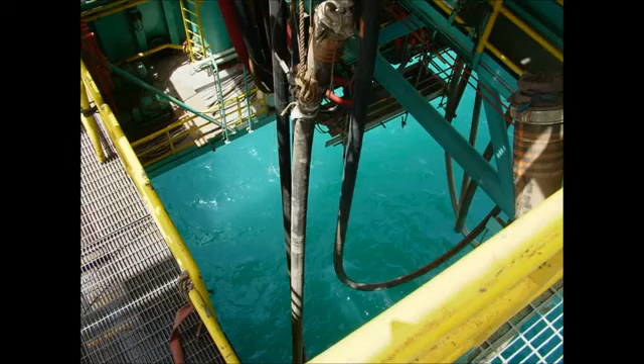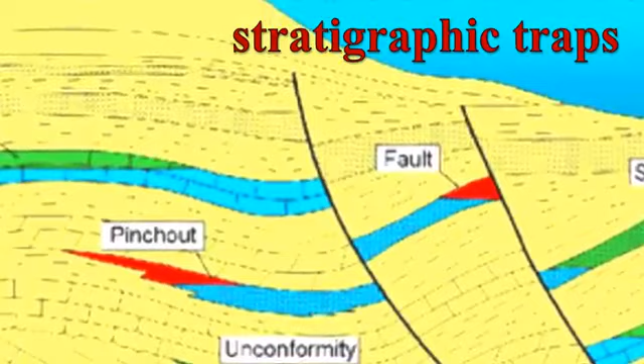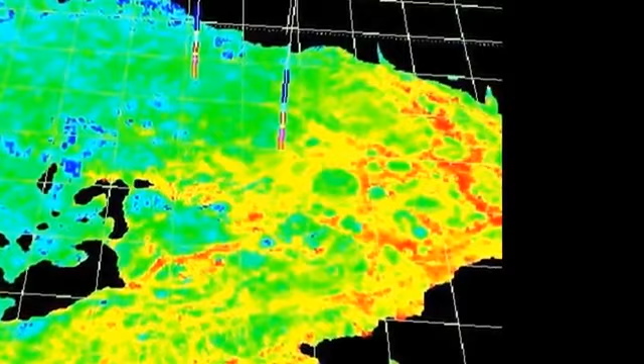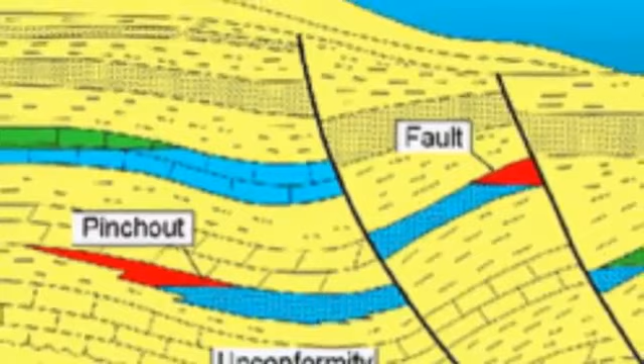When appraising and developing stratigraphic traps, the step-out procedure is different. Because seismic data is of little value in these kinds of traps, other available, less accurate data is used to help establish the spill point. Unlike pinpointing the spill point in an anticline trap, finding the spill point in a stratigraphic trap, unfortunately, is less accurate, resulting in a greater potential for drilling dry delineation wells.

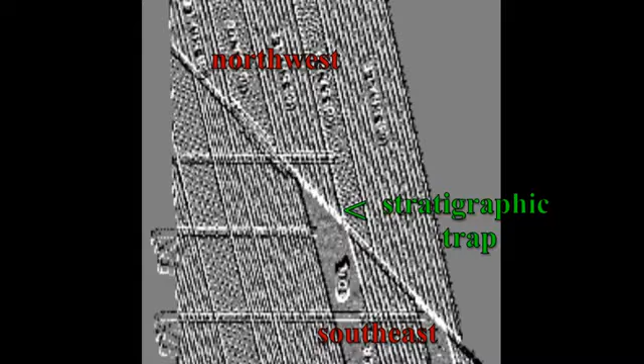When looking for the spill point in a stratigraphic trap, it may be necessary to rely on data from outlying, producing fields in the vicinity where data is available. For instance, if stratigraphic traps nearby have shown a southeast-northwest orientation, then the exploration team may use a similar pattern in their own gradual step-out.

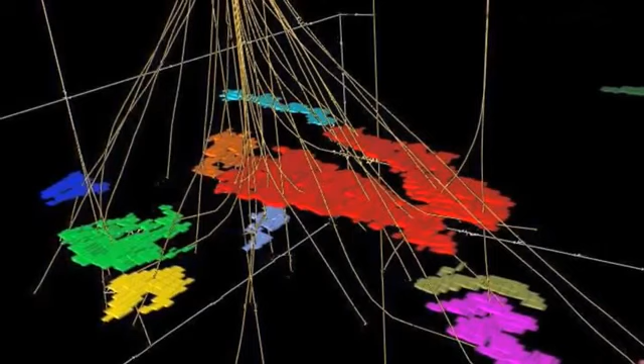In any event, once the exact dimensions of the reservoir with its thickness and locations of the hydrocarbon deposits have been determined from an accurate mapping of the OWC points, then OOIP, original oil in place, can be calculated for this subsurface structure. See Chapter 5. Being able to calculate OOIP is important because it allows the team to define and then determine the size and scope of future economic field development.

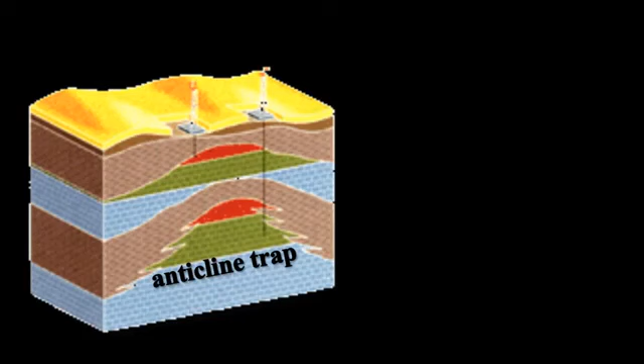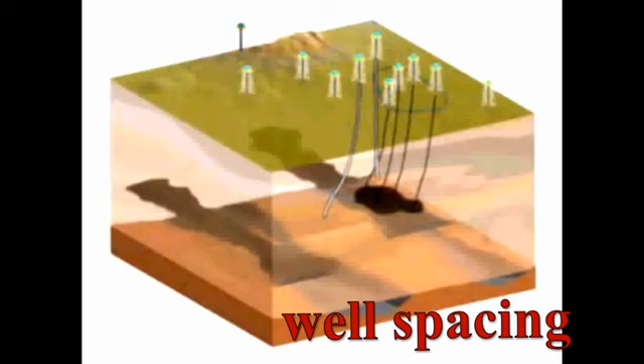Step-out drilling, therefore, whether in structural traps like anticlines or stratigraphic traps like a pinch-out, is important when conducting a field appraisal for future development. Once the shape, size, and thickness of the contours of the field have been defined utilizing step-out drilling, the next major issue to address is well spacing. Well spacing involves a planned program that determines the optimal number and spacing of wells that need to be drilled to deplete a given reservoir over a reasonable period of time.

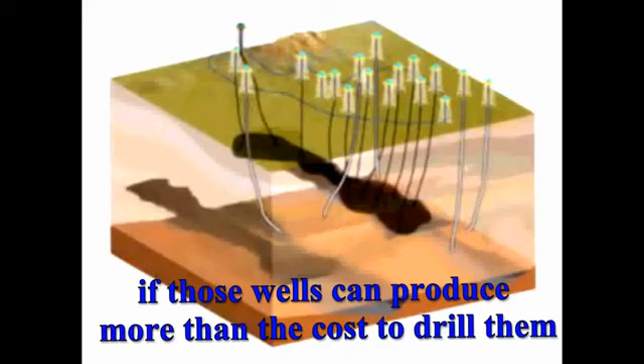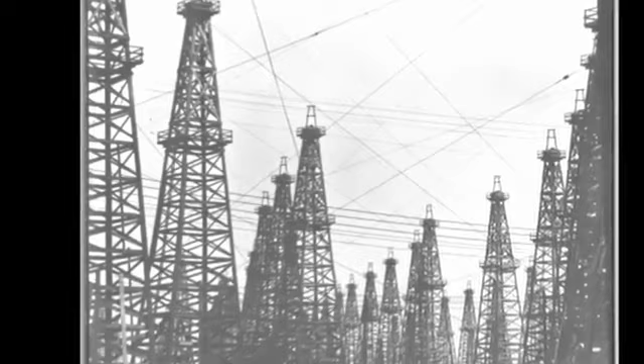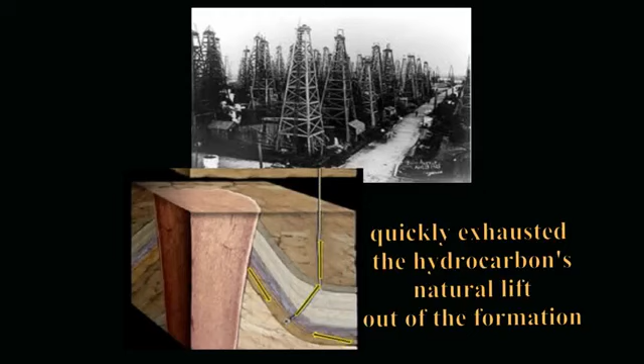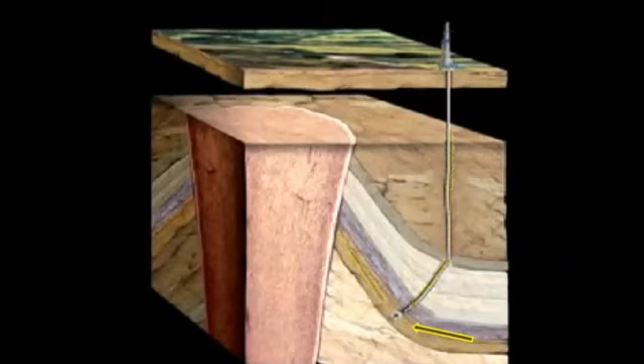In fact, it makes better economic sense to produce the oil at a faster rate with additional wells if those wells can produce more than the cost to drill them. How many wells, though, are too many? I'm sure you all remember old pictures from earlier times when derricks dominated the landscape over an oil field. Built practically on top of each other, these wells were drilled so closely together that they quickly exhausted the hydrocarbons' natural lift out of the formation. The result was that in these oil wells, production became so low they had to be abandoned, even though oil was still trapped in the formations. These wells did not have enough lift for the oil to flow to the surface.

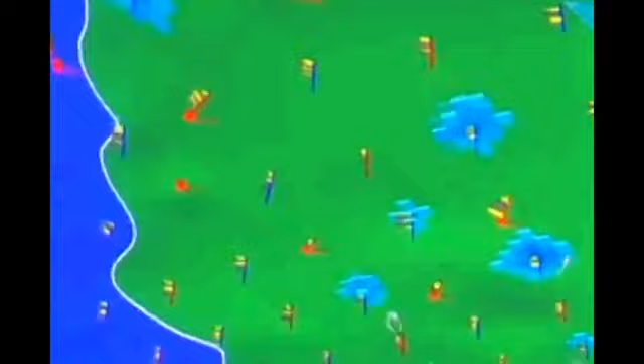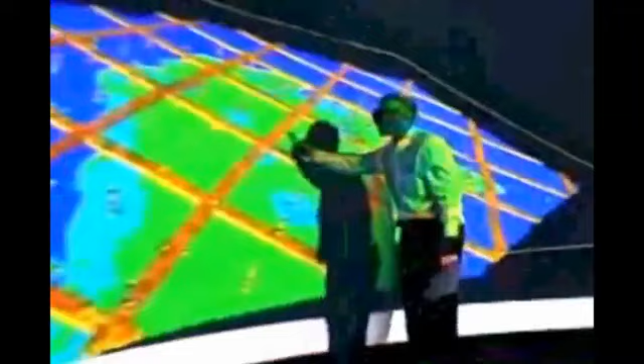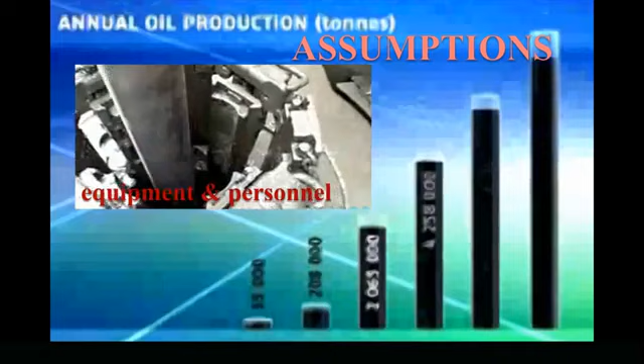Good engineering and a better understanding of the reservoir over the years, fortunately, have greatly increased our ability to improve the percentages of the amount of hydrocarbons that can be produced from a given reservoir. Well spacing, therefore, is a strategy that helps improve these percentages of hydrocarbon production while recognizing economic realities. To arrive at an optimal number, assumptions about the future costs of equipment and personnel, the spot and future prices of oil and gas, and interest rates have to be made. In addition, fluid viscosity should also be added to the equation.

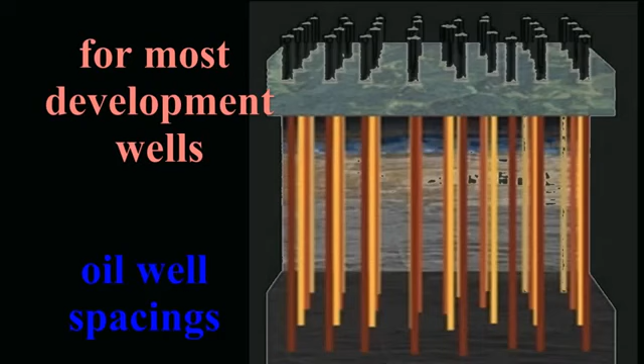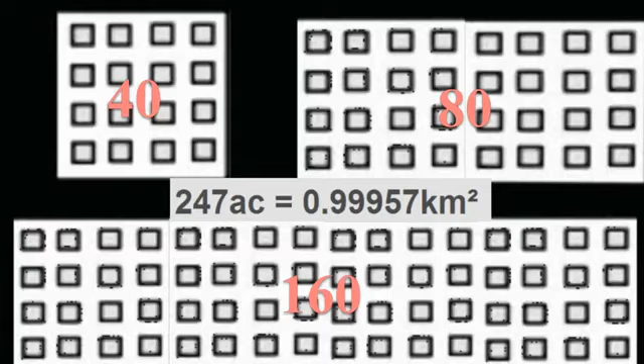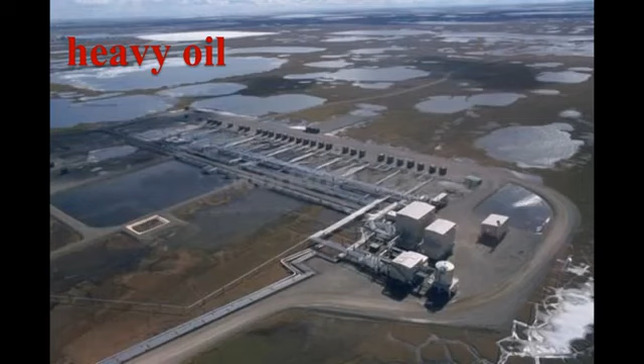For most development wells, oil well spacings are typically 40, 80, or 160 acres apart. Remember that there are 247 acres in a kilometer squared. There can be exceptions to how far apart producing wells need to be. Heavy oil fields, for example, could be drilled as tightly as 1/2 acre per well. Gas fields, on the other hand, typically use a 640 acre spacing. In any event, well spacing that defines the number and location of wells to be drilled, along with step-out drilling, are essential components in field development.

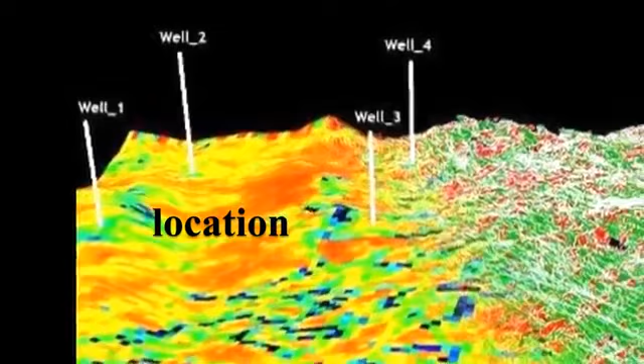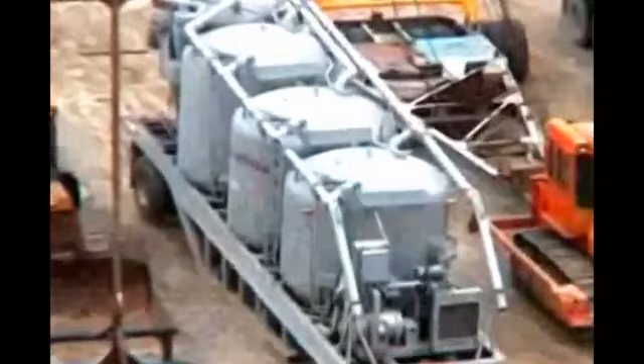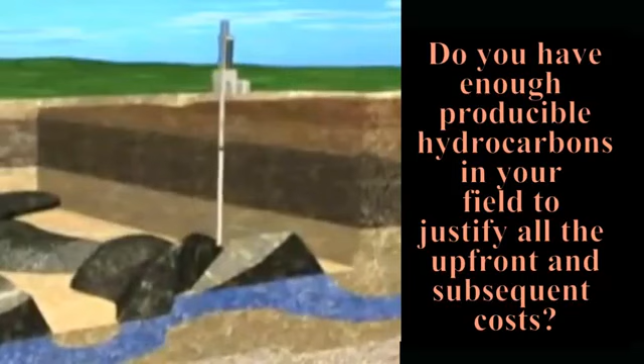By knowing the location and the number of wells you will be drilling, you can plan for the costs of the overall equipment, like surface facilities, personnel, pipelines, general oil field equipment, etc. Being able to put a tentative price tag on the estimated costs of development and production, you are now better able to answer the question of whether you have enough producible hydrocarbons in your field to justify all the upfront and subsequent costs.

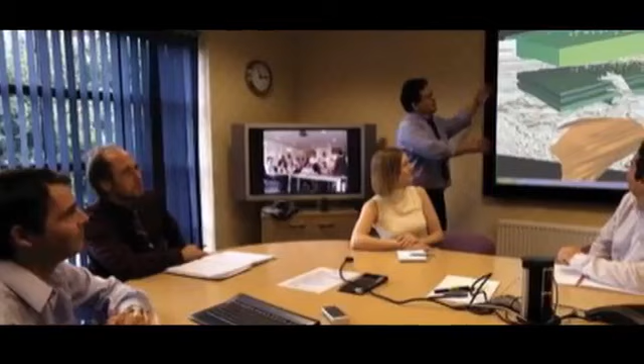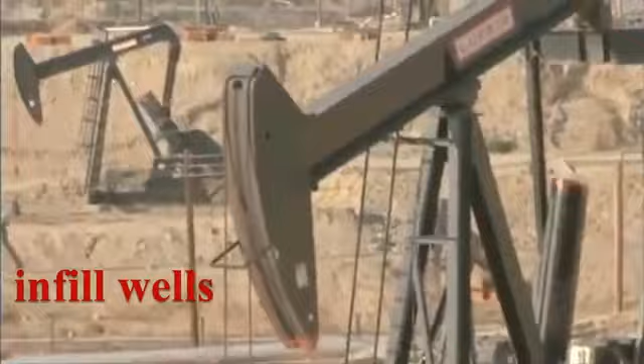After the step-out drilled field has been evaluated, optimally spaced wells have been planned, and the decision to go forward has been made based on the field appraisal, the process of drilling production wells to produce hydrocarbons begins. Like all plans, falling production rates in a reservoir over time may force field development plans to be revisited. These wells are known as infill wells. Unlike step-out drilling and well spacing, infill drilling usually is done after the well has been in production for some time, so the equipment to conduct infill drilling will be that of a production well, not an exploration well.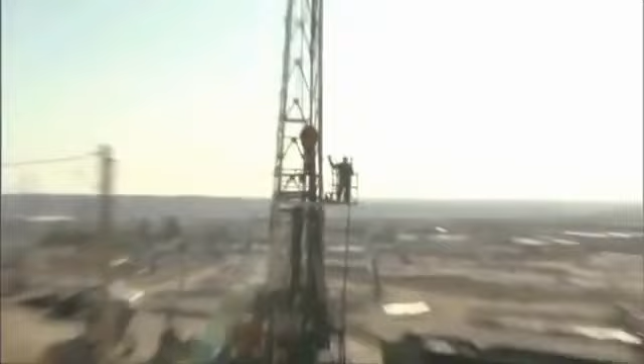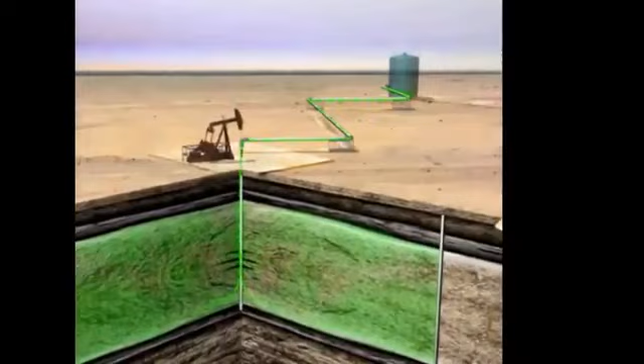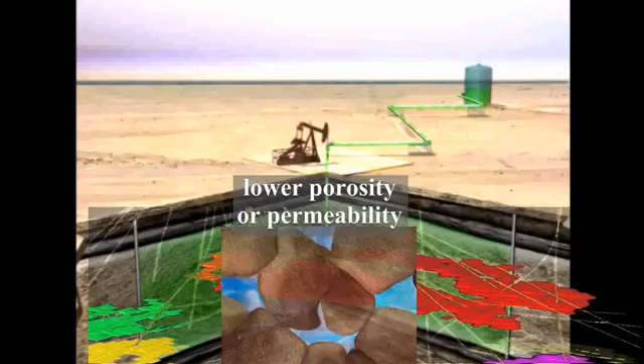There may be several reasons for drilling infill wells. Here we will describe three. One reason to drill infill wells is due to a reevaluation in the time needed to deplete a reservoir. Remember, oil fields are not always homogeneous. For example, some sections of a reservoir may prove to be of lower porosity or permeability than was calculated in the original appraisal.

These changes could adversely delay the time that this field could have been adequately depleted using the original spacing. When non-homogeneous conditions arise, these newly drilled infill wells will usually encounter reservoir pressure close to the original values, allowing production to proceed as planned.

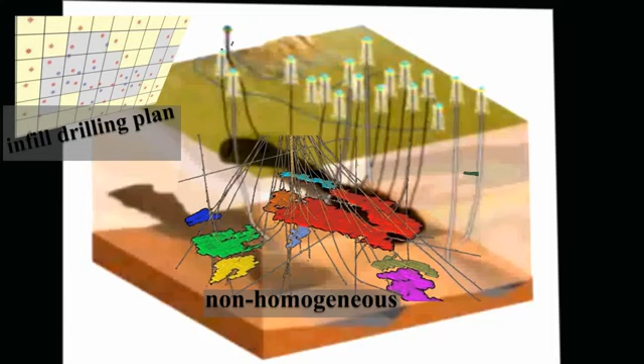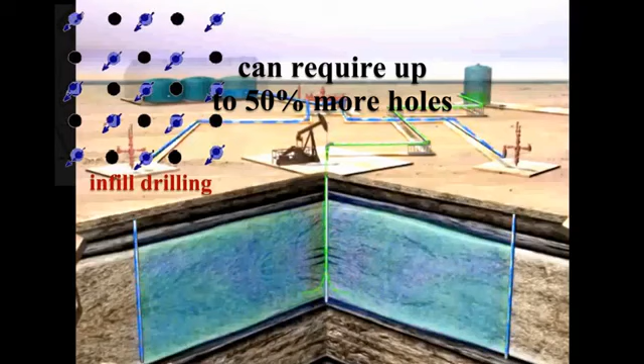A second reason for infill drilling is that once primary recovery has been depleted, secondary and tertiary recovery methods may have to be initiated in the field. Secondary and tertiary recovery methods, as we explained in Chapter 5, can require up to 50% more holes than drilled during primary recovery. In these cases, additional wells called injector wells are drilled to add fluid and/or pressure into the formation. Even though injector wells can be either previously drilled producing wells or newly drilled ones, these injector wells can greatly increase the number and reduce the spacing of drilled wells in the field.

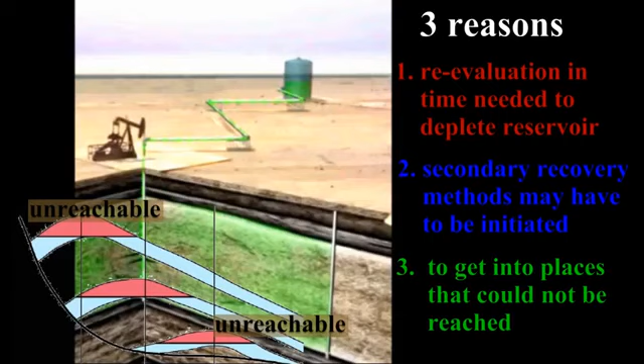A third reason for drilling infill wells is to get into places in the reservoir that could not be reached by the original spacing and configuration of the wells. Let's look at an illustration of a field where infill drilling was warranted. This field was originally drilled in an 80-acre grid pattern. To infill, a well is drilled in the middle of each square with the 4 original wells forming the corners. In effect, these center wells can double the number of wells and change the spacing in this field from an 80-acre well spacing to a 40-acre spacing.

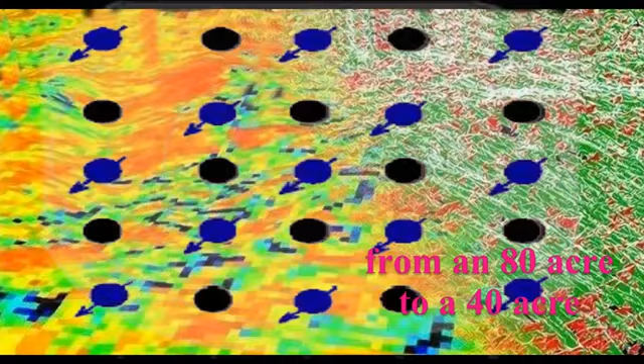Although step-out well spacing and infill drilling are common in both onshore and offshore fields, it should be pointed out here that due to lower costs, onshore appraisal and development enjoy at least one advantage. Because adding additional production onshore facilities is relatively cheap in comparison to offshore, onshore development is better able to proceed in what is known as a phased development of a field. Phased development, a popular choice, allows both appraisal and development activities to occur simultaneously so that costly errors can be more readily remedied.

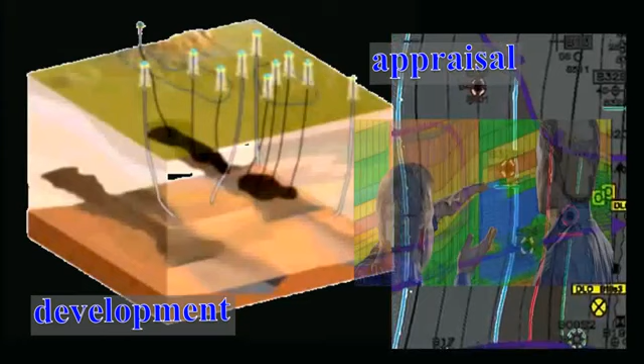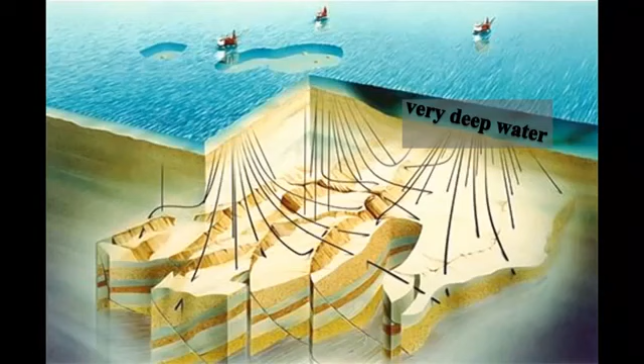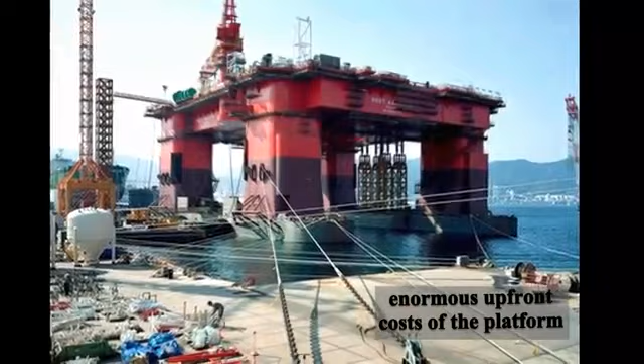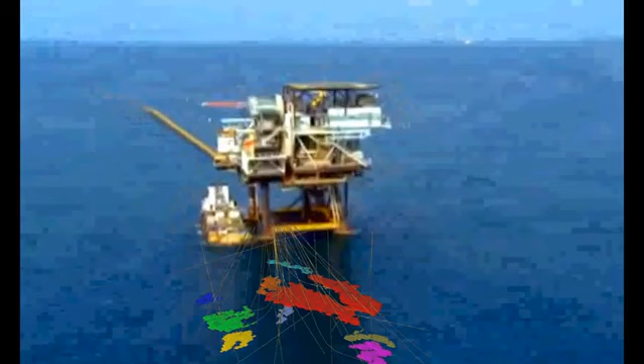Offshore appraisal and development does not have as much margin for error. For example, the appraisal process, even for oil, is much more intensive in very deep water. There, it is necessary to make certain that the field size and production rate will be high enough to justify the enormous upfront costs of the platform. This is a very different economic profile than that for onshore or for shallow water development, where each well can stand alone and be profitable in its own right. Offshore, the field in deep water must be large enough to justify the added costs to develop it.

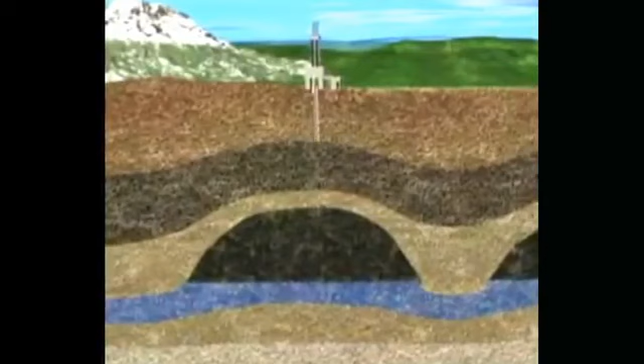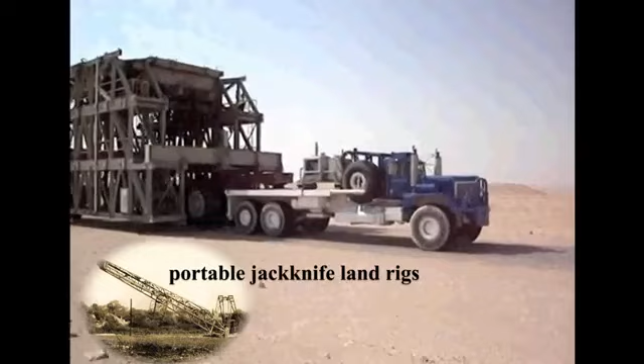Once all the available data has been evaluated in a field appraisal, a final decision will be made that determines the next step. If hydrocarbons are present in economic quantities, and if they can cover the costs of the development, and if economic conditions are right, the company will most likely develop the field. Onshore, many times the wildcat well, as well as some of the delineation wells drilled during step-out drilling, can quickly and easily be readied for production. In addition, portable jackknife land rigs can be pulled by trailers to the site on newly constructed or existing roads to complete the drilling plan as outlined in the appraisal.

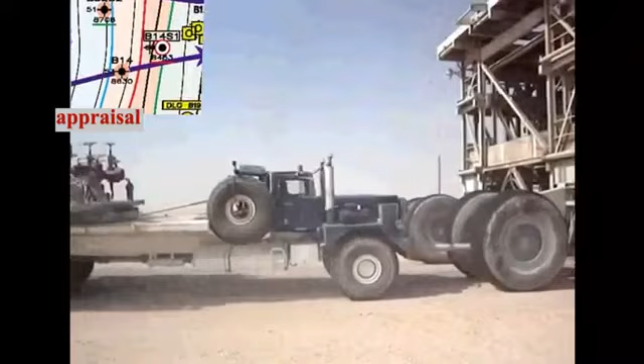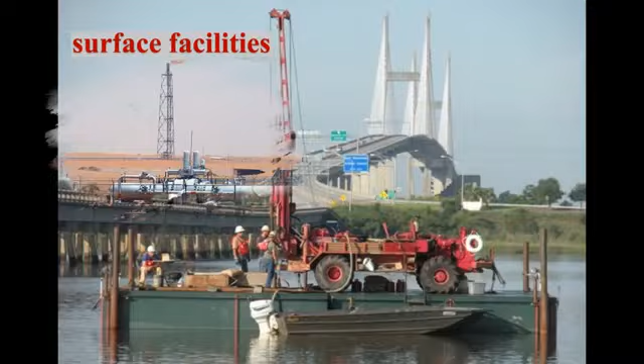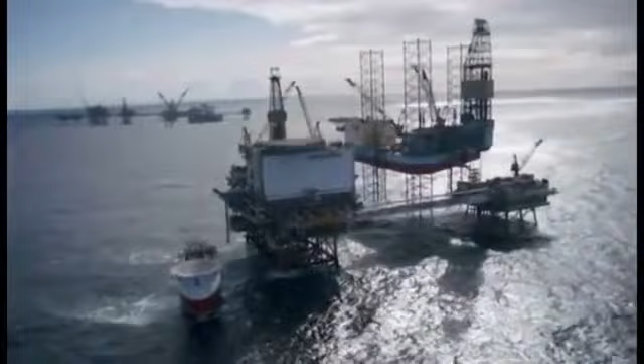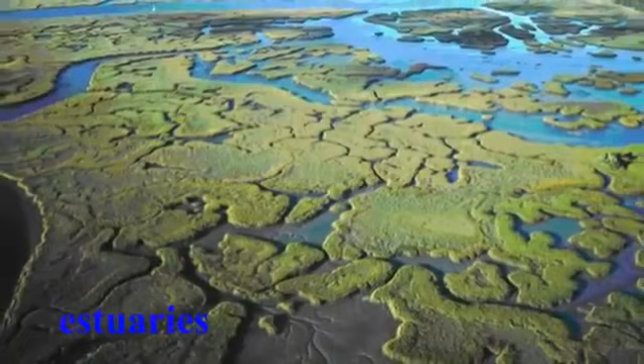As you might guess, in very shallow, protected offshore fields, development may proceed similarly to those onshore. The deeper the water and the increasing intensity of the wind and waves sitting on top of the field, however, present additional challenges that usually increase costs and the time required to get the field into production. Let's examine the equipment and procedures used to address these challenges in developing a field offshore. We'll begin with the most protected of offshore locations. In shallow, protected waters found in marshes and estuaries near land, production procedures are very similar to those found onshore.

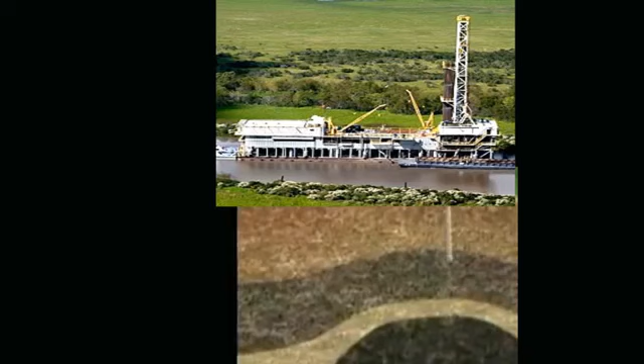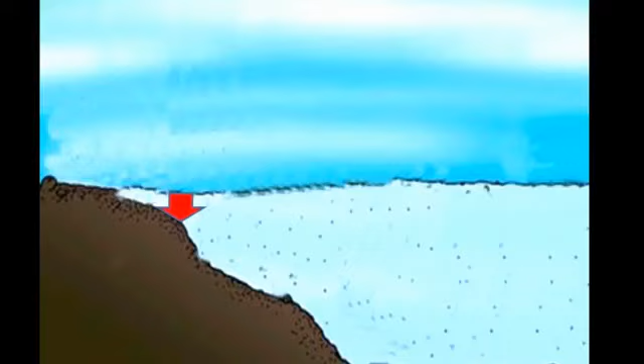Here, barge-mounted rigs are easily pushed to location where the barge is then flooded until it sits on the bottom. Once a vertical well is drilled and completed, the barge is then refloated and moved to the next location, leaving the wellhead and Christmas tree sticking up out of the water. For very shallow water depths of less than 10 feet, dredges are used to cut access canals for the drilling barges.

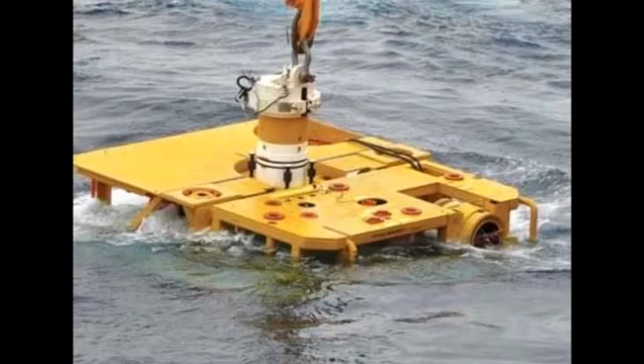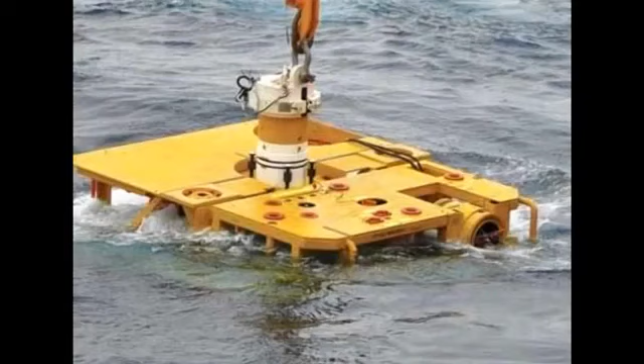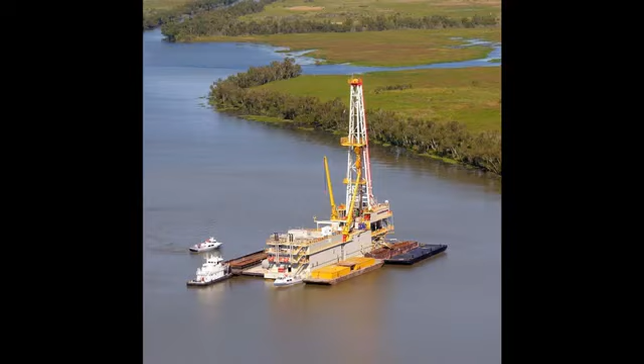A work barge is moved in and a small jacket or toadstool is set down over the tree and pinned to the bottom with piles driven through its legs. This functions as a dock for small boats used by the operating personnel and gives them a place to stand while working on the tree. This jacket or toadstool also protects the wellhead from being accidentally struck by other floating barges, boats, or debris. Barge-mounted rigs are ideal for areas where water depth does not exceed 25 feet. Not only can barges be used in shallow water, they can also be used onshore in low-lying swampy areas.